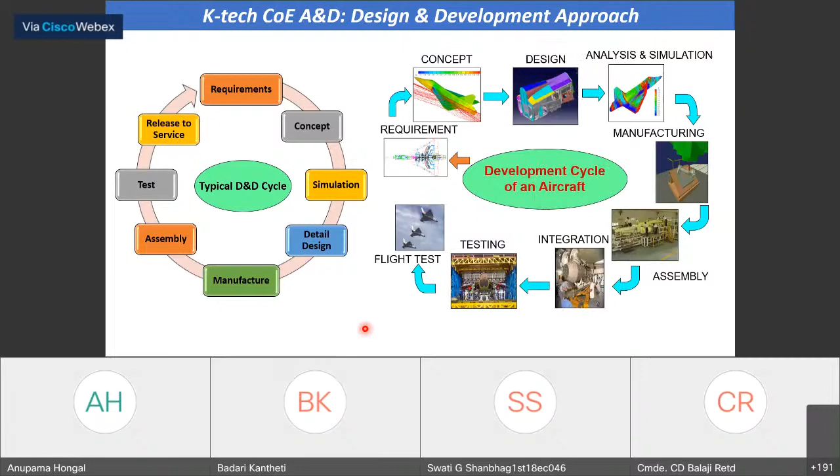So here in this slide, you are going to see the various courses we are covering in the center, apart from the orientation course you are likely to go through the next 3 days. We have a series of certification courses available. What we call the internship program is for the students currently still doing their degree course. And after graduation, if you would like to come to the aerospace fold, that is what we call the foundation course.

In this, you have 160 hours of training, with 30 hours of theory, 100 hours of practice. I'll have a specific slide on that and give you a little more details. And this course, either internship or foundation course, forms the basis for going for the advanced course. In the advanced course, you will be understanding in a deeper sense both the theoretical aspects and how deep you can learn the tools, particularly the CAE and other tools, and apply them to a project.

In this, though it is 4 months, more than 2 months you will be working on a project, so that with the knowledge you have gained and the tools experience, you will perfect yourself before you look for any job or further studies. So that's how the advanced course is going to help you. And students also come and join us in the 8th semester for their project. At the end of the 7th semester, those who have not gone through the internship program will get a complete idea about aerospace.

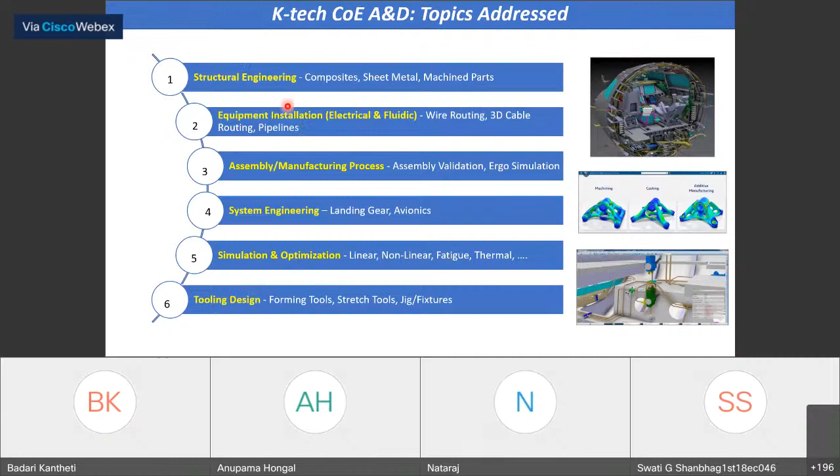In going through all this, your tools are very important: jigs, fixtures, other tools. So you will also be hearing about tool design. Our courses are connecting with all these different topics. Now coming to the internship course or the foundation course: these are the various subjects you are going through in 30 hours.

Along with that, you will also be learning about various CAD tools: CAD, CAM, FEA tools, and also some sheet metal work, piping or tubing, composite design, analysis, and manufacturing. All these tools are available in 3DEXPERIENCE. In the next 3 days you're going to have a demonstration of all the tools and how exactly they can be used.

That lab portion is around 30 hours, and for 30 hours you will be doing a mini project, so that whatever knowledge and tool skills you have gained, you will put into practice, using more than one tool to do this exercise.

And this is about the advanced course. As I said, you have theory and also a digital lab. Apart from that, you also have experts coming from the industry. We'll cover certain areas of theory, but beyond that, what is currently happening in the field, some experts will come and give you.

Other than that, you have a simulator experience. At the same time, you also visit various industries and R&D labs so that you can see how the manufacturing and the design aspects are going on within that industry.

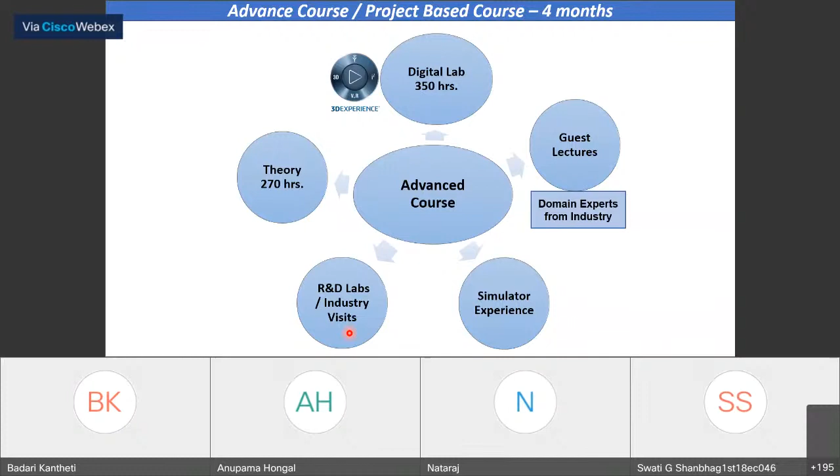So this is the exposure you are going to get through the advanced course. And these are the various tools available on the 3DEXPERIENCE platform connected with design, analysis, modeling, simulation, etc. In this you have CATIA, most of you might have heard about it. Connected with CATIA, an FE package, SIMULIA and Abaqus, is available. You have Dymola, then you have DELMIA.

And also you have one more, as a management tool, to gather all the information and make sure at every stage of the component design progression, are you satisfying all the requirements you have stated? That is the ENOVIA package. Much more is available, but this is what is fundamental, very important for any component design. That is the walkthrough you are going to go through.

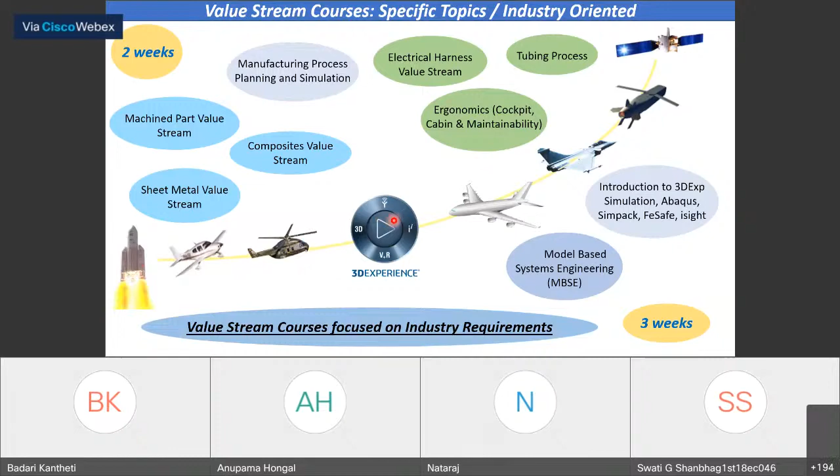Coming to value stream courses, as I said, you have core courses for 2 weeks, and you also have 3-week courses. Any of you interested in any of these courses are welcome to take them and get the certification. In summary, this Center of Excellence in Aerospace and Defense will provide an ecosystem for R&D activity, prototyping, design, analysis, simulation, and manufacturing. All the tools are available. You can get the exposure. These courses are what we have customized at this point, but if the institution comes out with a particular syllabus, we'll definitely try to support you on that also.

Another important thing about the center is that students can exploit the center facilities and the knowledge base at any point of time. You are a part of our center, get one certification, you get the badge. Using the badge, anytime you can contact us, get information, clarify certain things, and if you have an idea and want to check whether it works, you want to use the tool for a few days or hours, you can always come and use it, provided the tools are available at that point of time.

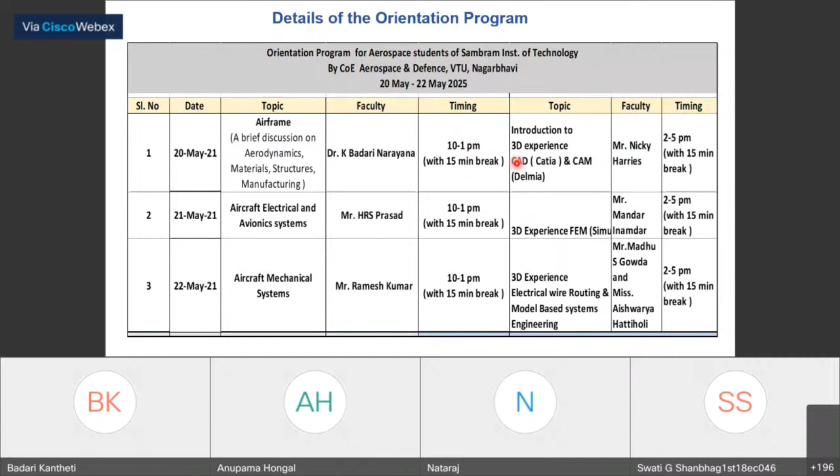So quickly, the program for the next 3 days. After this, I will take you through the airframe. The next 2 days on the theoretical side, two colleagues are going to talk about the electrical avionic systems and the mechanical systems. In the afternoon, we have demonstrations lined up on 3DEXPERIENCE connected with CAD, CAM, FEA, electrical wiring routing, and model-based systems engineering. So you are going to have good exposure, and you can decide which course is interesting to you and which you want to practice.

When we talk about internship and foundation courses, this is what we have at this point, but we have also designed a number of other courses interesting to other students, not necessarily aerospace. As Professor Ravishankar said, this is not meant only for aerospace students. Any student is required in the aerospace domain because it comprises multiple fields, and one student cannot take care of everything. To cater for all that, we have other courses on composites, design to manufacture, and electrical harness, again design to manufacture.

Model-based systems engineering is a widely used tool currently by most academic institutions, so your design process is very clean. You can take simple examples and apply these concepts. And CAD and CAM integration using 3DEXPERIENCE, covering a wide variety of CAM, that is manufacturing, processes. Those interested in production areas, this is going to help you a lot. Of course, you need to understand how to read your drawings, so CAD is very important. From there, how to move into various aspects of CAM, that is what we lined up.

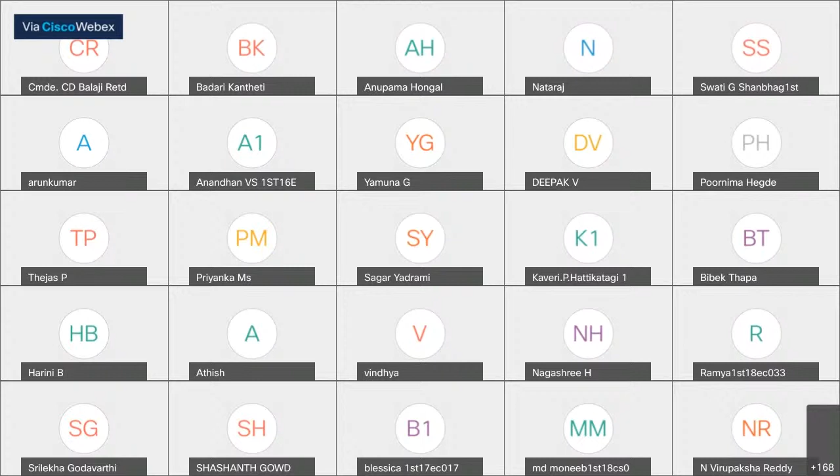Like Professor Ravi Shankar brought out, aerospace is a domain which encompasses all fields of engineering. And there are multiple computers. For example, in Tejas, which I was part of, there are at least about 30 to 35 computers of different types. The hardware design is done by the electronics people. And each of these requires an extensive amount of software. So software development, both algorithm level, the actual coding, as well as software quality testing, is done within the aerospace community by computer science or information science people.

So there is a significant amount of exposure and utilization that computer science people have within the aerospace domain. Like I said, every branch of engineering comes together. In fact, for structures, civil engineers actually do the structural design and so on. So there is scope, and part of it will probably be answered by Mr. Prasad in tomorrow morning's session. I hope I have answered that question from one of the students. Thank you.

So this presentation is visible to everybody, I suppose. Dr. Badari. Yeah. Am I audible? Yes, sir. Okay, how about this presentation? Visible? Yeah, visible, sir. Okay, right.

Thank you. Okay, so quickly, over the next 2 hours, I will take you through the airframe systems. It is one of the important systems in the entire aerospace vehicle design. In the airframe, when you are talking about the frame, you are talking about a structure. That means some shape. The shape is given through certain materials and a certain manufacturing process you assemble together. That's the skeleton or structure you are going to get, and that is the flying machine. And we are talking about aircraft, so naturally it flies in the air.

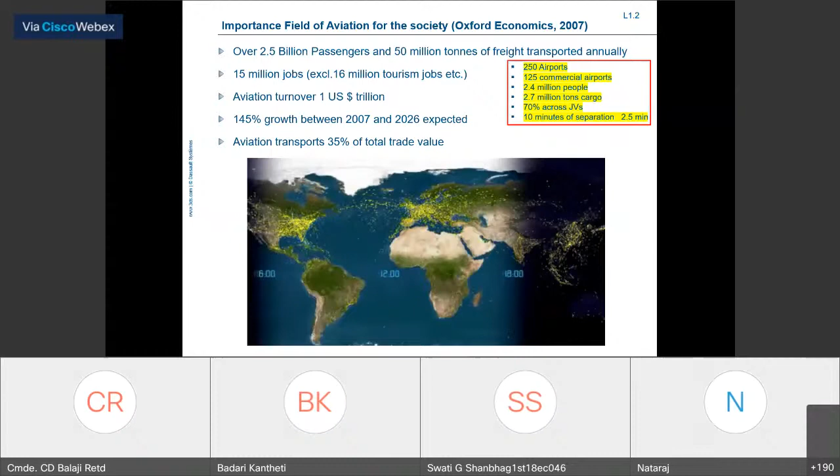Okay, when you're talking about aerospace, we are talking about two things. One is aeronautics, the other one is astronautics; put together, aerospace, which is a very, very fascinating subject. We'll try to take you on the journey of the entire aerospace vehicle. But once you are in space, the space environment also you have to take into account while you do certain designs. Otherwise, in this case, the vehicles are within the Earth's atmosphere, like aircraft or helicopter, etc. Whereas when you're talking about astronautics, we are talking about the vehicle going beyond Earth's atmosphere. That's where you have launch vehicles, satellites, missiles, etc.

So all these vehicles work on three principles. We know very well the balloon or airship, which we have been using for centuries. They work on buoyancy. We started with hot air, then hydrogen, and currently we are using an inert gas, helium. Then another one is using Newton's principle, second and third law. That's where your rotating blades, helicopter, or a fixed wing come in.

The cross section of a wing is what we call an aerofoil. As the aircraft is moving, the air moves over the top and the bottom of the aerofoil or the wing. So a lot of changes happen. The velocity keeps accelerating on the top and is more or less fairly constant at the bottom. This makes a big difference in the pressure differential. At the same time, the volume of air moving and the momentum of the air coming out causes the force generated.

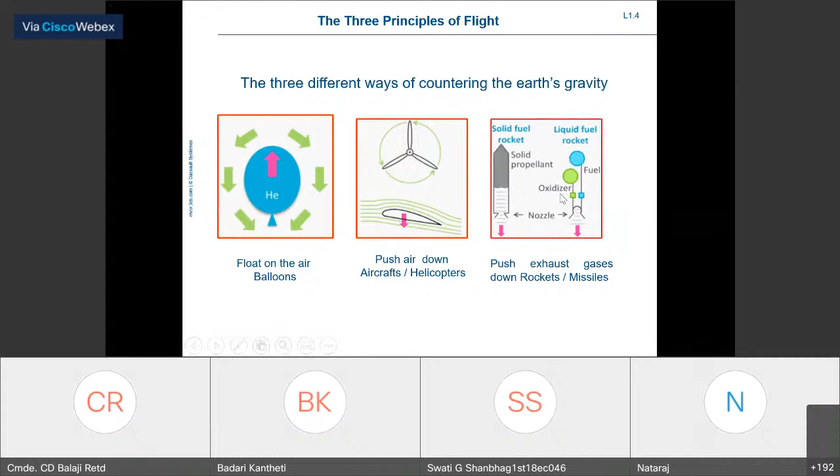So that means force is generated. Because it is not held, naturally the reaction force is in the other direction, so it starts moving. That is what is actually happening. So we are trying to use one of these principles in order to overcome gravity.

Coming to the aircraft, you have lighter than air and heavier than air. This is where the balloons or the airships come in. And you have rotary wing, helicopters, or fixed wing. So now you have the aircraft.

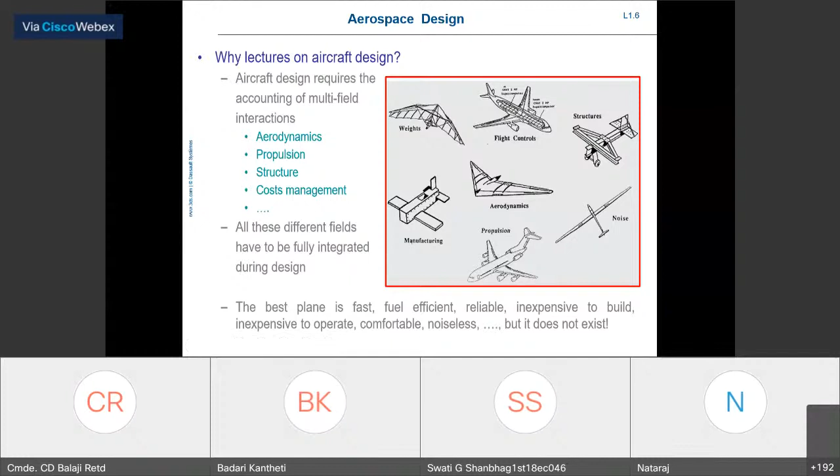As we are discussing aerospace design, aerospace design looks for multiple field interaction. This could be aerodynamics, structures, propulsion, controls, various systems and all those things. That is why all the different fields have been integrated during the design stage itself. That is very important in order to get a plane which is faster, fuel efficient, reliable, inexpensive to build and operate. All these characteristics we would like to get through our design.

At this stage, for the benefit of all the students, some of you might have seen this clipping through various media, I'm not very sure. This is a jumbo 747. In a quick sense, he will try to explain to you how this big tonnage is lifted into the air, how the aerodynamics works and what supports that, and also, if you want to control it, how you control it. Of course, he is not going to go very deep, but it will definitely tell you how the aeroplane actually flies.

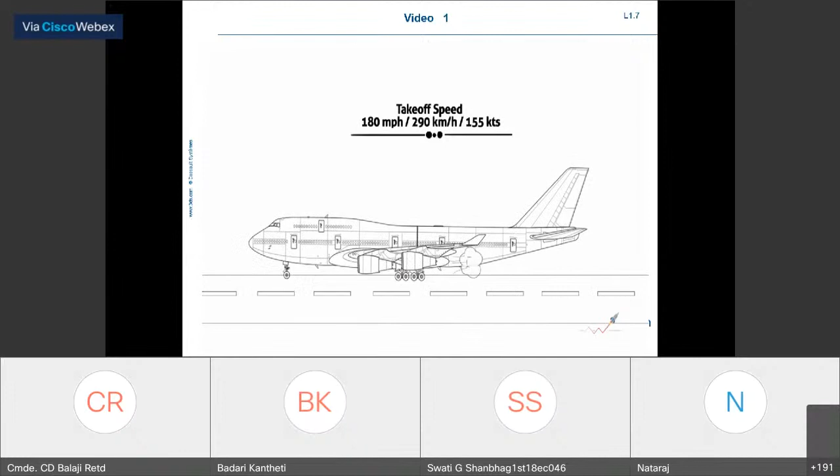Those who have ever flown on an airplane know that it's an enormous, amazing machine. A typical 747 can carry more than 500 passengers and weighs around 800,000 pounds when taking off. Yet it rolls down the runway at a speed of 290 kilometers per hour and, as though by magic, lifts itself into the air and can travel up to 13,000 kilometers without stopping. Incredible, isn't it? Today, we are going to learn how an airplane flies in a very simple way by going through the aerodynamics of an airplane, the main parts of an airplane, and controlling the airplane.

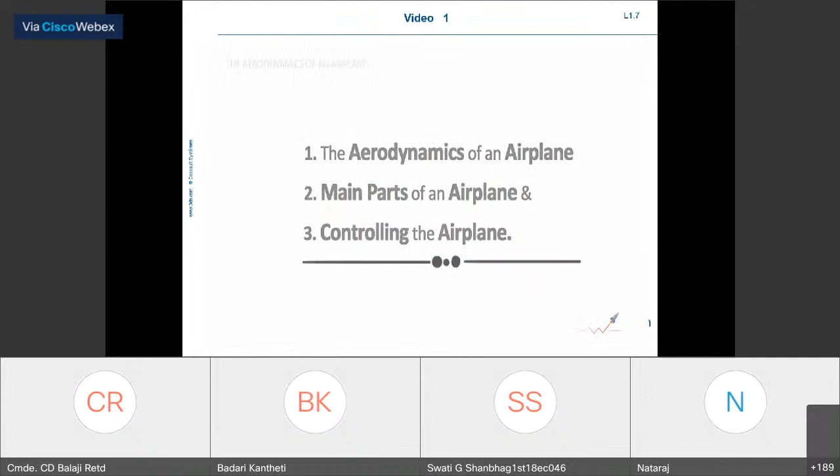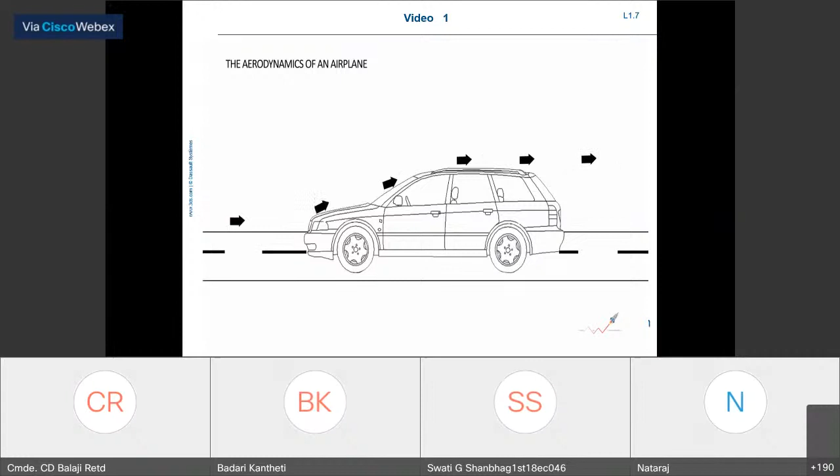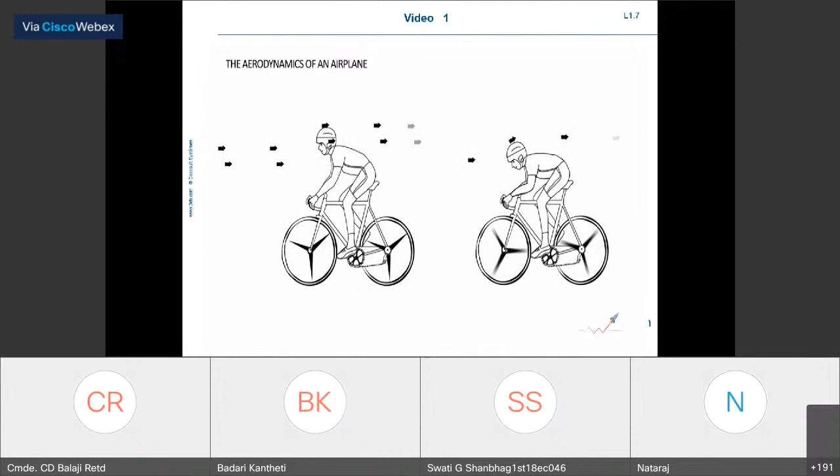The aerodynamics of an airplane. The 4 aerodynamic forces of an airplane are drag, thrust, weight, and lift. Drag, also called air resistance, refers to the forces acting opposite to the relative motion of any object moving with respect to a surrounding fluid. The energy it takes to push through the surrounding fluid creates drag. You may have noticed an excellent example of drag reduction in track cycling. The cyclist must push through the mass of air in front, but a streamlined sitting posture that cuts through the air more smoothly enables a cyclist to travel much faster with less effort. The airplane always retracts its landing gear and nose gear into the body of the plane after takeoff to reduce drag.

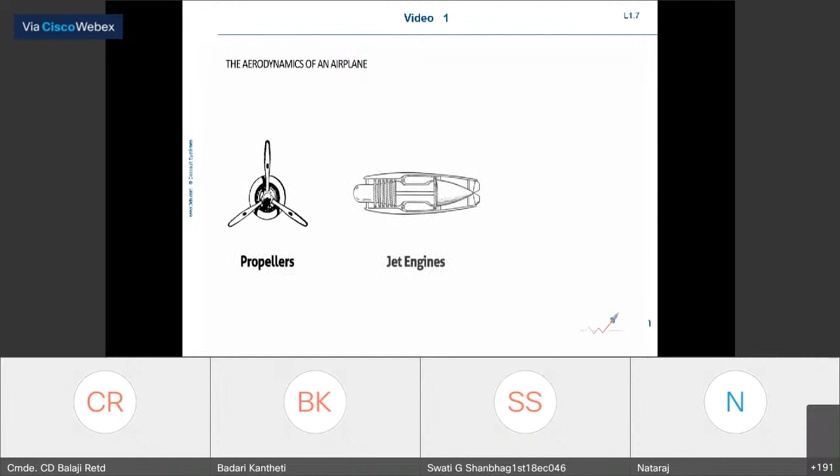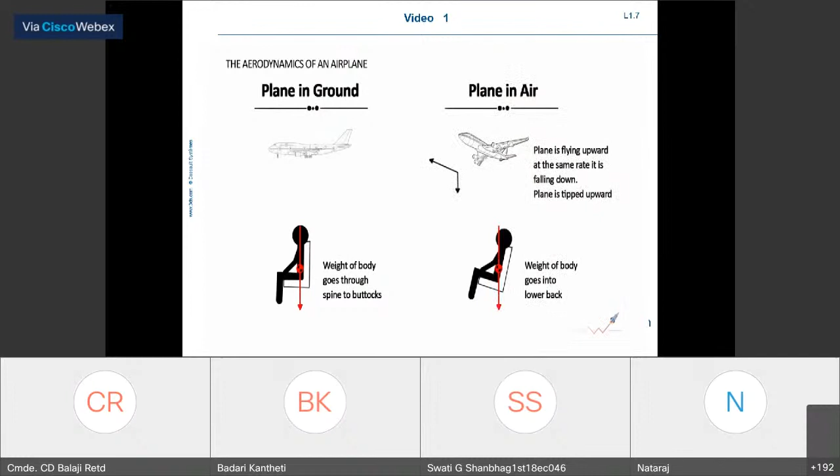Thrust counters drag. It is a mechanical force that keeps the airplane moving in the air. Thrust is generated by propellers, jet engines, or rockets. The compressor inside the jet engine takes the air and compresses it, and after processing through the combustion chamber and turbine, the gas is blown out through the exhaust nozzle. Here, Newton's third law of motion is applied, where the gas is pushed backward and the engine is pushed forward. Weight is the airplane body, passenger, and luggage weight in total. Lift overcomes the weight and holds the airplane in the air. Lift is created mostly by wings to keep the plane aloft.

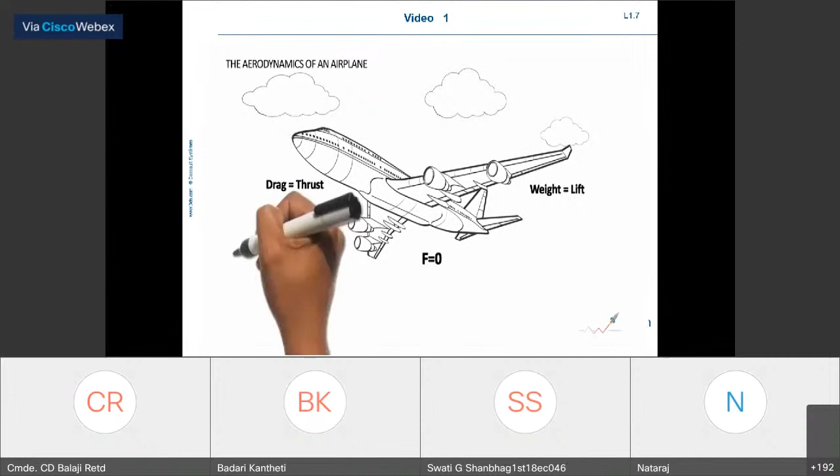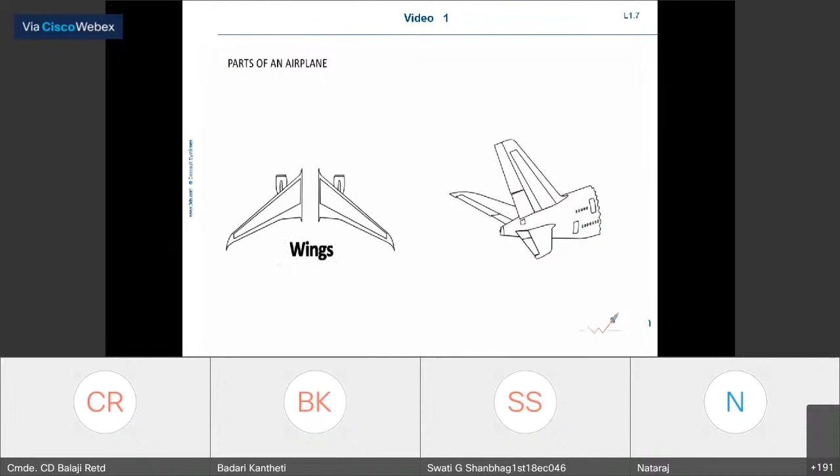So, to keep the airplane flying straight and level, this must be true, which means no net force acting upon an airplane. If drag is greater than thrust, the plane slows down. If thrust is greater than drag, the plane moves faster. If weight is greater than lift, the plane descends. If lift is greater than weight, the plane climbs. Parts of an airplane. The basic parts of an airplane are 1. wings, 2. horizontal stabilizer, and 3. vertical stabilizer.

So here he is not talking about the major parts, he is talking about the parts that are important for controlling the vehicle. We'll try to see that in a next slide.

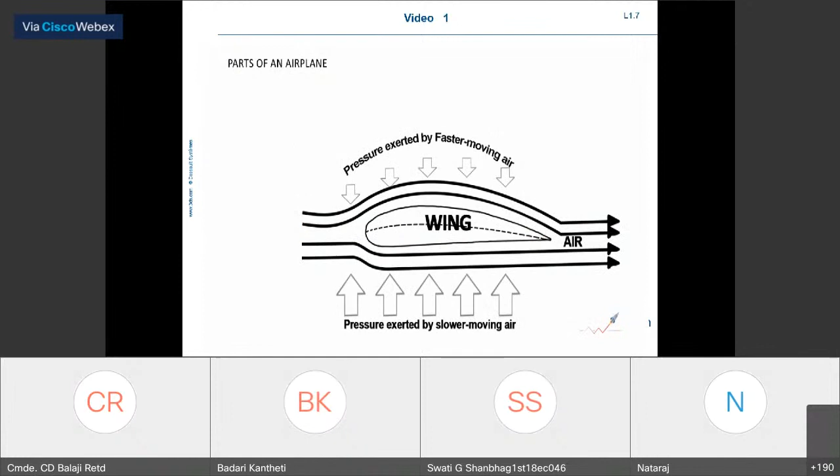The wings. This special shape is designed to deflect the air at the bottom of the wing, so more air strikes the bottom and less air the top of the wing. As the airplane rolls down the runway, higher pressure and more upward force are produced below the wing and lower pressure and lesser downward force above the wing. The net result is the lifting of an airplane.

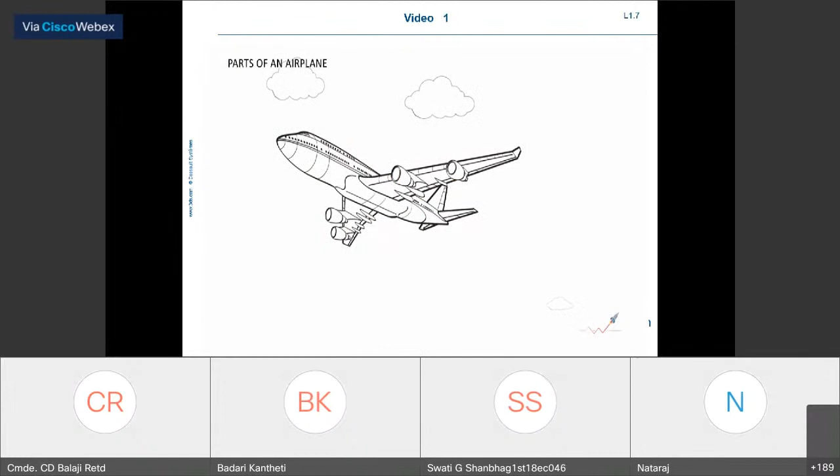Stabilizer. Stability in an airplane is a tendency to return to its initial state after a disturbance from that state. Horizontal stabilizer performs this function when the disturbance force causes the nose of an airplane to move up or down. Such movement is called pitch. Vertical stabilizer provides stability for a disturbance in yaw. Yaw is side-to-side motion of the nose.

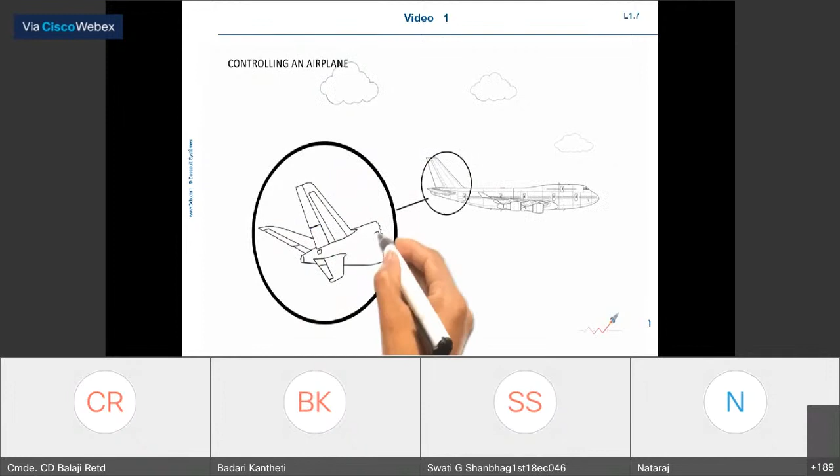Controlling the airplane. So what are the components in an airplane which control the flight, direction, and height, and maintain the equilibrium? It's elevator, rudder, and aileron. The elevator can be deflected up or down to produce a change in the downforce produced by the horizontal tail. If the elevator is deflected upward, it increases the downforce produced by the horizontal tail, causing the nose to pitch upward. If the elevator is deflected downward, then the counteracting force causes the nose to pitch down.

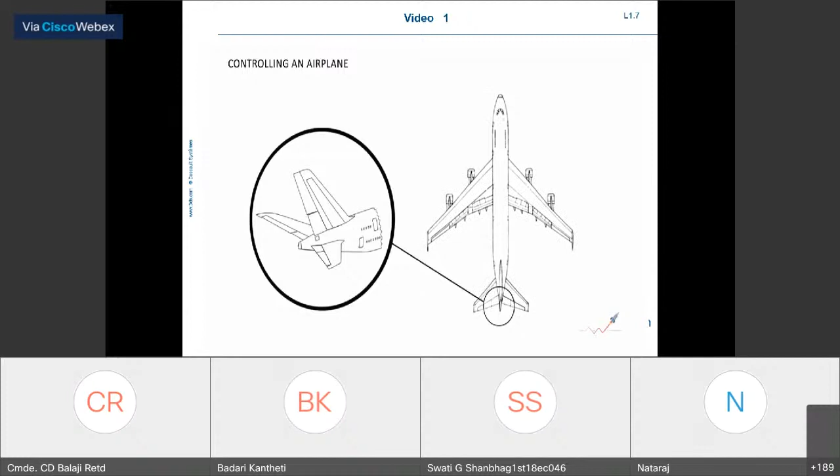The rudder can be deflected to either side to produce a change in the side force produced by the vertical tail. If the rudder is deflected towards the right, it creates a side force to the left, which causes the nose to yaw to the right. If the rudder is deflected towards the left, it creates a side force to the right, which causes the nose to yaw to the left.

Ailerons are located on the tips of each wing. Ailerons can be used to generate a rolling motion for an aircraft. Ailerons usually work in opposition. If the right aileron is deflected upward, then left is deflected downward, and vice versa. Let's see this. To curve the flight path, the pilot deflects one wing to move up and the other wing to move down by controlling the aileron.

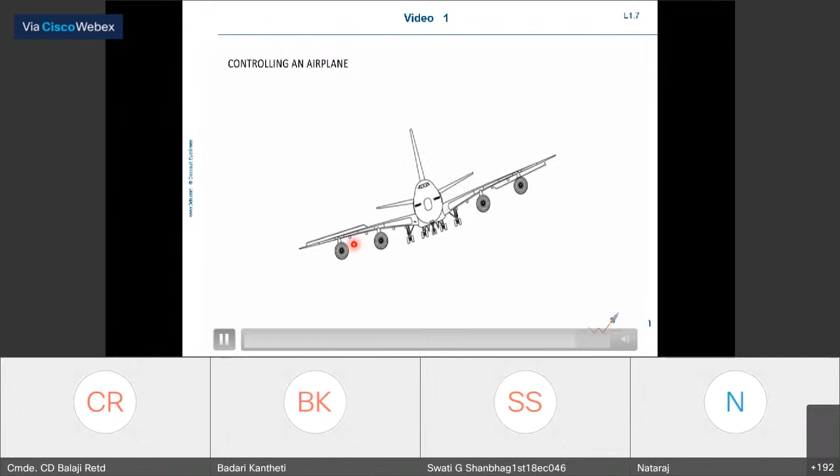With the left aileron in downwards direction, the lift will increase, whereas at the same time, the aileron of the right wing is in the upward position. Therefore, lift on the right wing is decreased. The result will roll the aircraft to the right. If the pilot reverses the aileron deflection, right aileron down, left up, the right wing will lift up and the airplane will roll to the left. The next time you travel in an airplane, you'll know how it works.

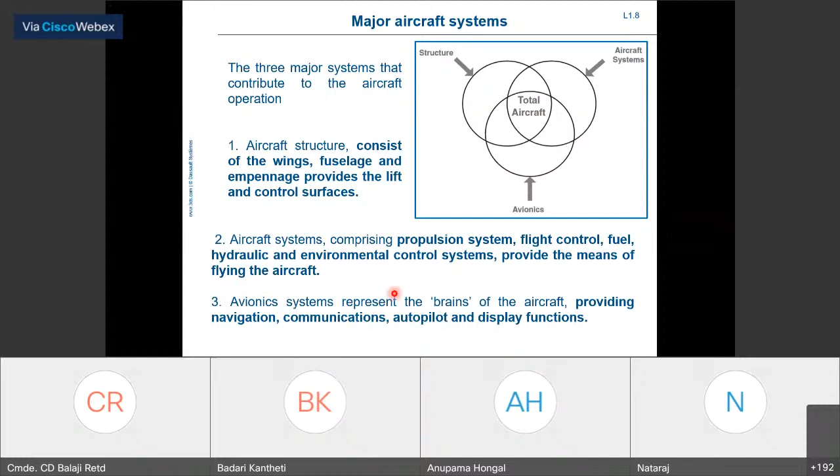Then within the body, you have the various systems, which will provide a means of flying the aircraft. I think tomorrow you are going to hear more on this. The systems like propulsion control system, fuel system, environmental control, all those systems are used. But at the same time, you have to always navigate during the flight and communicate within and outside also. At the same time, what are the parameters with which the flight is taking place? You have to display all those things. Avionics and the electrical system play a very, very key role. So that is another system. So now you have airframe, then systems and avionics.

So as you understand rightly, airframe is all hardware based. So that means a strongly physical integration of the airframe along with the systems. All these systems are connected at various locations of the structure. So that's why there is a physical integration of these two systems. But these systems will try to generate energy and transfer energy from one place to another. So the systems along with avionic systems will try to communicate appropriately. So that is why there is an information based connectivity between these two.

At the same time, the avionics systems are responsible to look into the mission completion aspects. That way, whatever the mission may be, information based integration is achieved between these two systems. So in any product development, you might have understood all these steps are involved, critical steps, concept to freeze the concept and try to identify which concept is evolved to take it to the final product.

That's your definition stage. Then you go through the design at various stages, and then verify your designs. Then try to build one or two components and test them, and make sure everything is working as per the requirements. Then you try to release for operation.

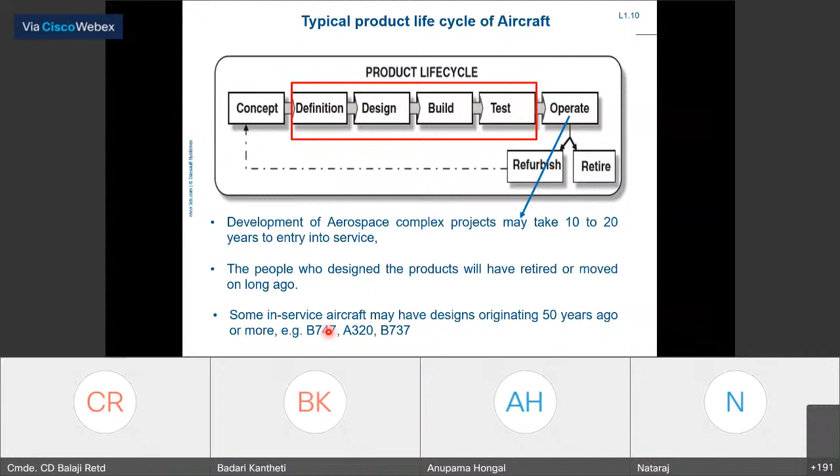Particularly, aircraft that have been developed over 50 years ago are still working. These were available around the 50s, 60s, 80s, but still various variants of the same thing are working, with improved materials, improved interiors, improved capability of the engines, etc. Thereby efficiency is increased and fuel consumption and emissions are reduced.

So in the overall design, we have to look into every aspect of that. When we talk about aerospace or aircraft design, we are talking about four branches connected with the airframe, mechanical systems and avionics. This is what I'm going to take you through in the next few slides.

Structures, materials and fabrication give you the physical system that you see. Aerodynamics helps the physical vehicle to fly, and the control system will navigate and support the movement of the vehicle from one place to another. This is some of what we are going to see.

To start with, I will take you to the structures, so you can see the physical vehicle. Then later I will go through aerodynamics and control. Then in the last stage, I will take you through materials and fabrication.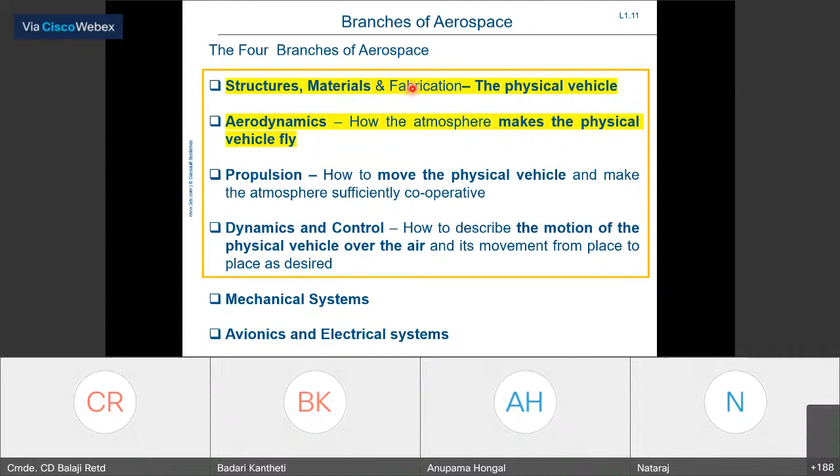In the air, you have aerodynamic loads, which could be smooth air pressure or gusts of air as you fly from one place to another. Thrust loads are going to be there. Overall weight is going to be there, and because it's all dynamic, inertial loads are going to be there.

As you go up into the atmosphere, internally you have to maintain a certain atmosphere, so pressurization cycles will be there. While taking off or landing, particularly, you have shock loads. These are the minimum design loads that are going to come.

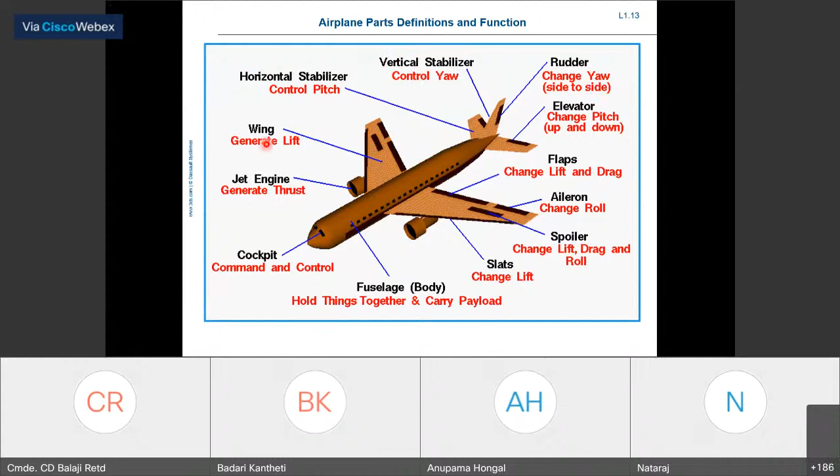So what you see in this picture is not only the parts; their functions, what they try to do, are given in the red color. Okay, we'll try to understand more on that. So as you understand the skeleton, the major components are nothing but the skin for the fuselage. Interior, you have a number of frames. And all these frames are interconnected by long members, one-dimensional members. So you can call them stiffeners, stringers, etc.

A similar construction is also there on the wings or empennage. But here the skin, and at the same time a number of ribs are going to be there, shorter ones and longer ones. And you have a number of control surfaces at the rear side and the front and also in the middle. And this will also house engines, or various tankages to carry the fuel, and it will also support the main landing gear, or the nose landing gear. So this similar construction is also available here. So that is what actually happens in the wing and empennage.

And the engine, for example, in all these cases also, because various systems are there, you have a number of fittings and brackets coming at various locations. These brackets are also required because tons of wire are going across the aircraft, pipelines and tubings are going, to hold them properly. So all those things are required.

So similarly, in the case of the engine, the pylon is nothing but how the engine body is connected to the fuselage. That particular portion is called the pylon, with a number of brackets. Nacelle is nothing but the podding or the outer covers. So a number of parts are connected with that, and also the tail cone where the exhaust is streamlined to go out, and the heat shield covering the exhaust so it does not come onto the wing or the fuselage. That depends on where the engine is connected.

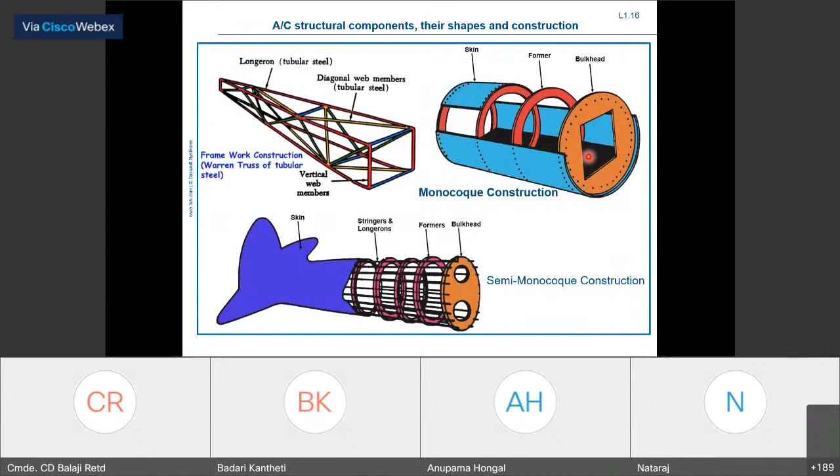Apart from that, for certain components, though I have not shown any picture here, we also use what we call sandwich construction, which is a much, much lighter construction. All the control surfaces of the aircraft are made of sandwich construction most of the time. Maybe they're also stiffened, but because weight is important, wherever you can cut down, you cut down.

As a designer, as a structural analysis person or a structures person, you need to understand what load is generated, where it is generated, and what path it is transmitted through. When it is moving through the basic elements of the structure, whether the member can carry the load, in what form it is going to carry the load, or whether these members are efficiently placed to take care of this load distribution. And you have to consider when these members are going to fail, and what the maximum load carrying capacity is. These are some of the things we'll always be thinking about as a structural engineer or design engineer, so you can address all the failure modes of your component or construction.

So this is what people are going to learn through structures, any structures, not necessarily aerostructures. But aerostructures are much more stringent from the quality point of view and the regulation point of view, so we'll try to implement that rigorously.

So at this point, I'll try to show you one more clipping, another 2 or 3 minutes. This is a student project where you are going to see the skeleton of a business jet developed by MSc students, where you can see structural elements of every major component, fuselage to wings to empennage to landing gear, and also a few of the various mechanical systems, and some avionic systems.

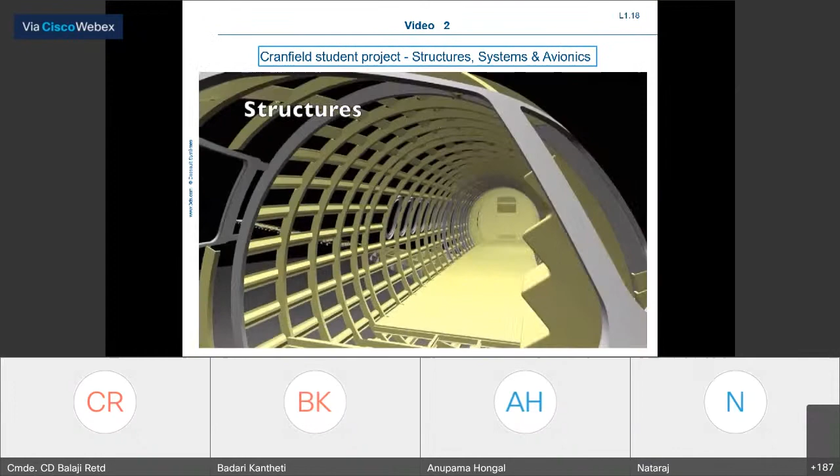You can see the structure. You can understand the fuselage, how the construction is. This will change from vehicle to vehicle. There is no uniqueness; the novelty is your innovation. How do you conceive the loads coming? How exactly do you want to place your material? In what form do you want to place the material?

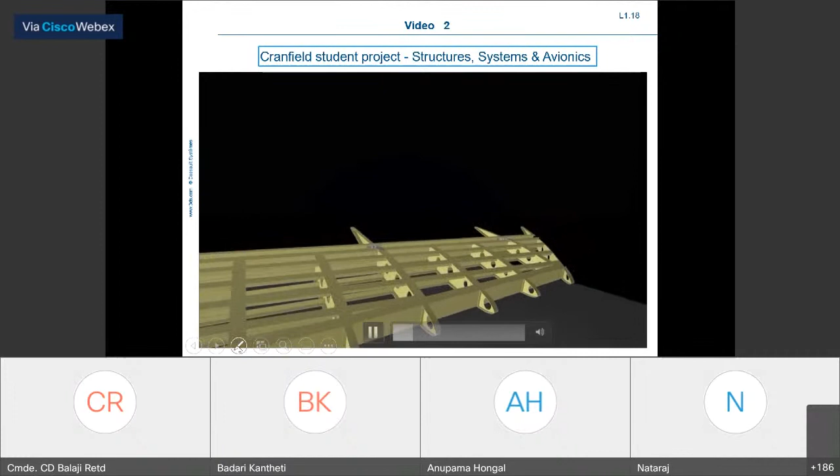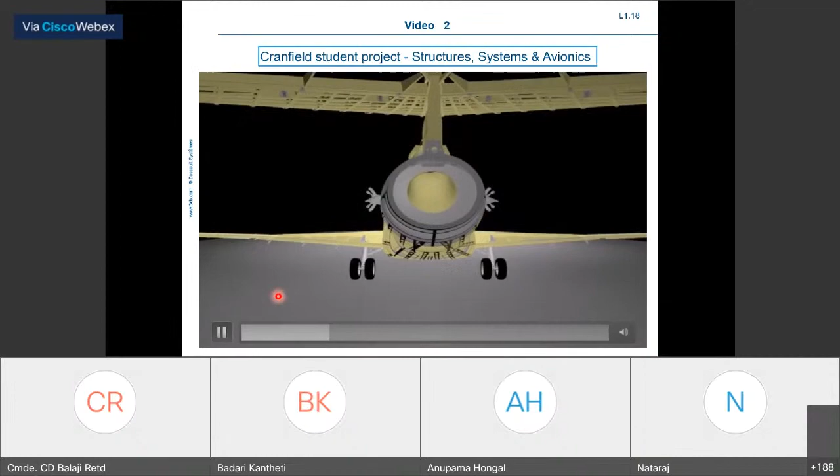You can see a series of ribs here. The horizontal and the vertical stabilizer with a number of ribs. Based on the aircraft, you can think of different constructions. You can see the landing gear, the entire wing.

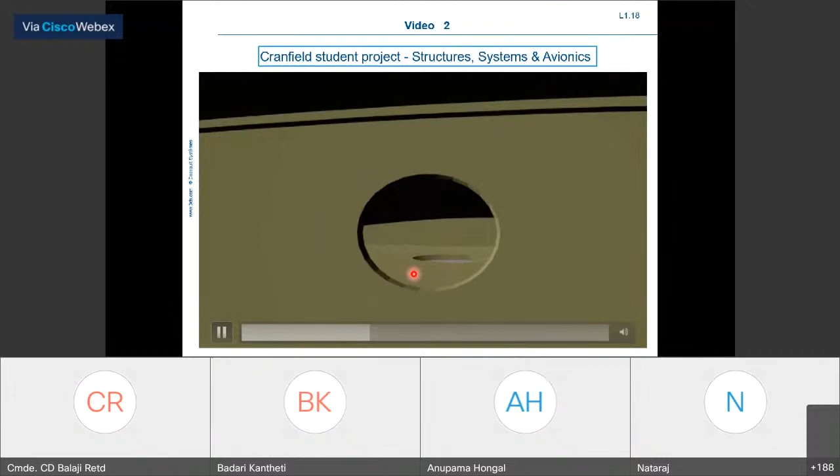As you walk through the wing, how is the construction? In order to reduce the weight, or to allow certain tubing and piping or maybe electrical wires, you may require certain cutouts. Then how do you attach the landing gear, the main landing gear?

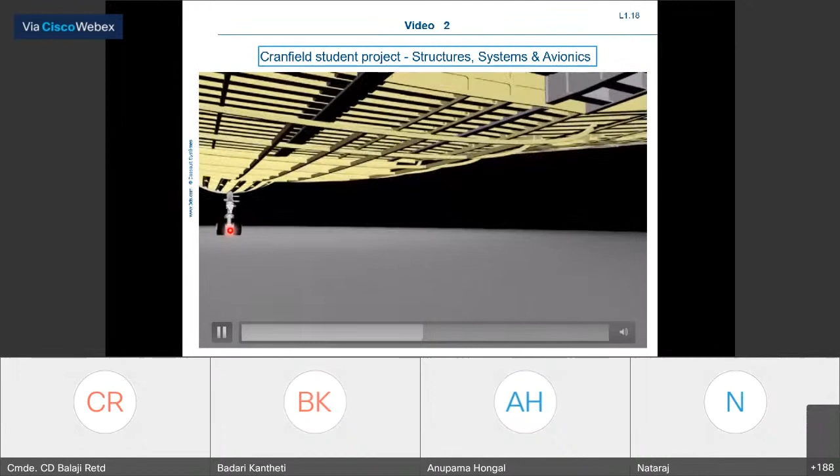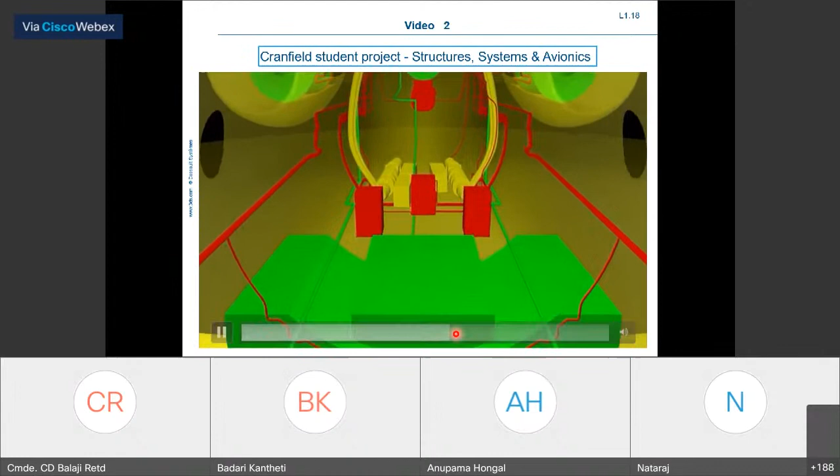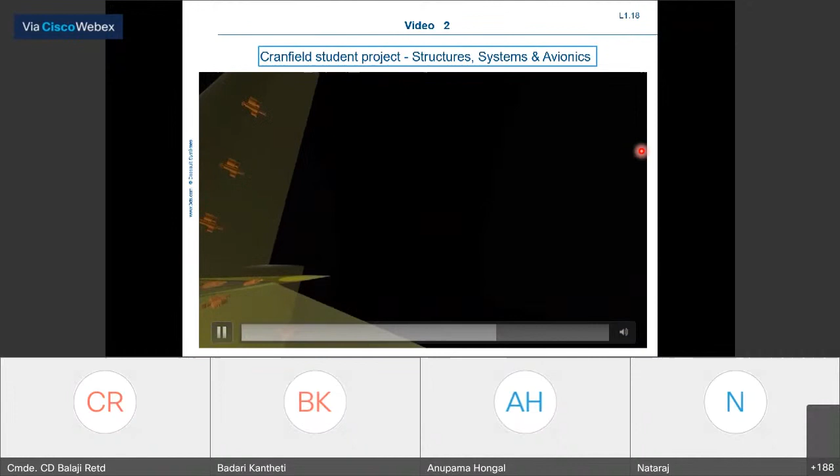Now you can see different systems. Prominently, they are going to show you the fuel system, propulsion system, and also electrical system, and the tubings. And also they show you the fuel tanks, where they are located. A few avionic systems, radars, etc.

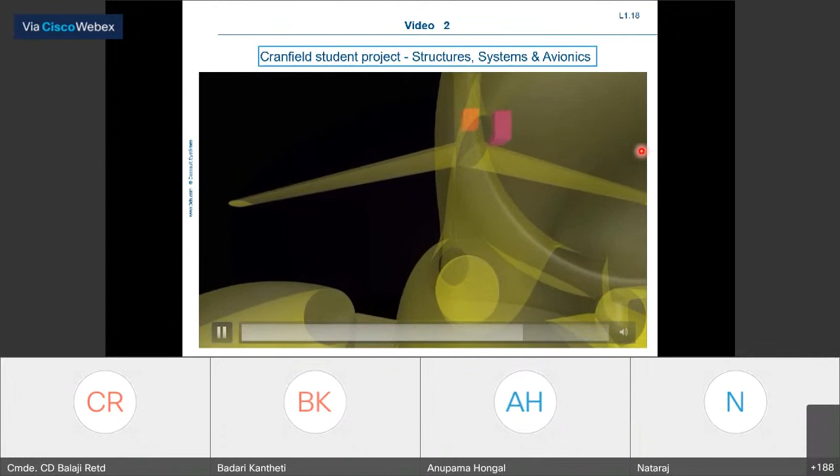So now I'll take you through another system, that is aerodynamics and controls together.

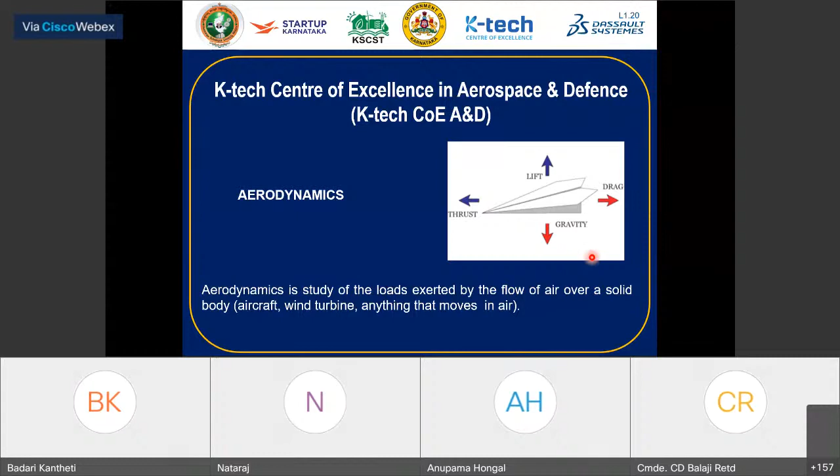So how does it work? It has to generate the pressure differential based on the configuration, and it follows the fundamentals of aerodynamic laws, that is, conservation of mass, momentum and energy. You might have heard about Bernoulli's principle, particularly those from the mechanical side or those who have taken fluid mechanics. That is your momentum equation, which can be simplified to Euler's equation, giving a relation between the pressure variation and velocity.

Now to that, you add one more term, the potential energy of the fluid particle with respect to ground. That is your Bernoulli's principle. In this case, we assume the aircraft is moving parallel to the ground, so that term goes. That's how we use Bernoulli's principle to understand the pressure variation, using the contour of the moving body, particularly the wing or a cross section of the wing, the aerofoil, contoured in such a way that you get the best benefit out of this.

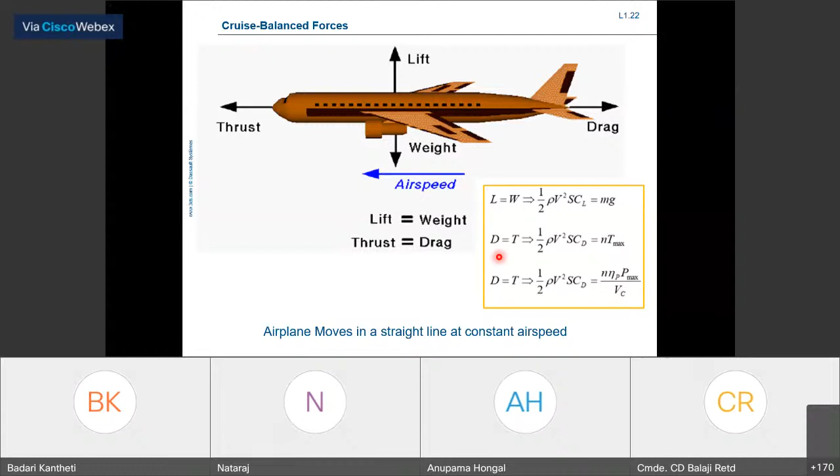So that can be generated by jet engines or by propellers. So that's why you have two equations: jet engine and its efficiency, propeller and its efficiency, and also what is the maximum critical speed it can move at. So these equations are useful in the early design of your components in order to find out how much is the wing area and what the aircraft engine requirements are. So these are simple things.

A component of the force is nothing but you integrate normal to the aerofoil, or normal to all the aerofoils along the wing. So that is the resulting lift that we are going to see. So in this process, how the aerofoil is tilted with respect to the airflow, what is the contour of the aerofoil, how much is the surface area of the aerofoil, what speed the vehicle is moving. So these are a number of critical parameters.

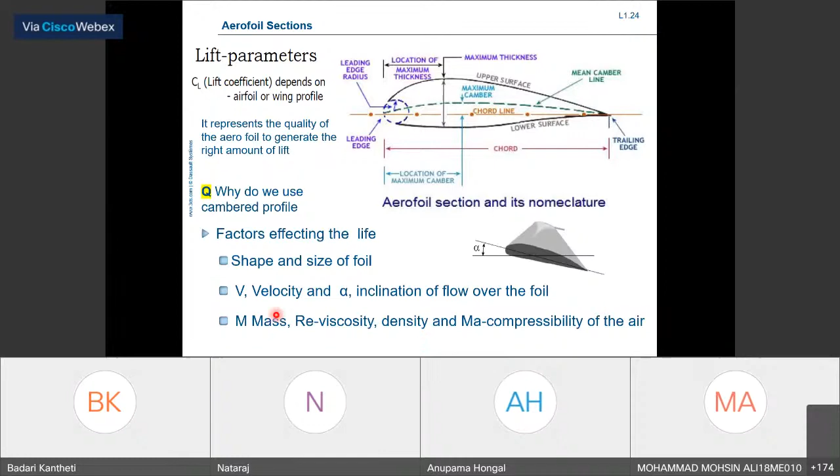So another important thing is, based on the nose up or down. That is required in order to control. At the same time, during any disturbance, you try to change it. So now a smooth flow is going to take place. Now this leading edge and trailing edge, whatever joins them, that is the chord. With respect to airflow, you try to lift the nose up, so the angle of tilt of the chord is increased.

So now airflow is going in that direction. This is a higher velocity, that means a low pressure, and this flow tends to move inside. So that is where you have a lot of turbulence. Any turbulence is nothing but a drag. That means this is going to cause the lift to come down. That's why the important parameter the designer looks at is angle of attack: how this angle is changing with respect to airflow and how the lift is being generated.

The lift keeps on increasing. At one point, it starts coming down. So beyond that, we should not operate the vehicle, particularly in the initial stage where the velocity component is very small, on the ground about to lift. So you have to appropriately take care of it by the area. But in a fixed wing, the area is fixed. The area is already there.

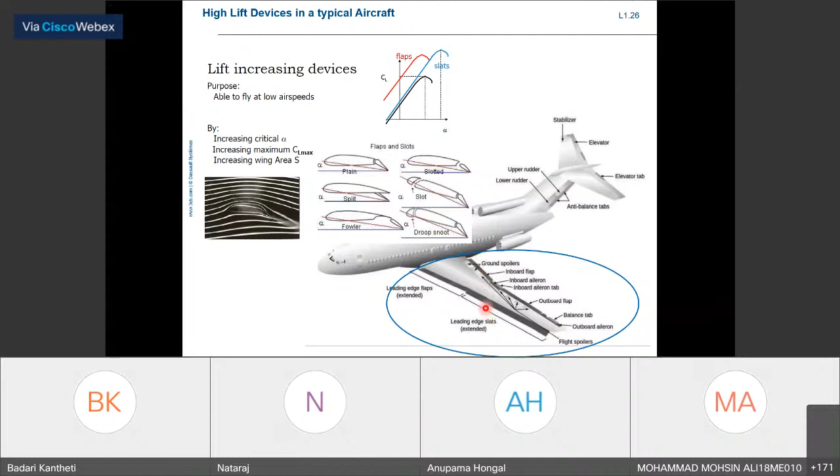Now you see, without all these additional surfaces, your lift is somewhere here. By having the slats on the leading edge, your lift is increased for any angle of attack. By having these flaps, you are further increasing it. So effectively you use these two surfaces when there is a requirement for higher lift.

Okay, so now coming to another aerodynamic parameter, a very, very important parameter, which is involved in the sizing of the engine: the drag. The drag is wasteful work. We have to cut it down as much as possible, but you don't have complete control. What you have control over is how to reduce the drag by various means of streamlining and perfectly maintaining the surfaces, and also the interference between one body and another where they are connected. So there are various types of drag. If you are able to control all these components of drag, overall you try to reduce it.

So to give you a flavor, probably in fluid mechanics, mechanical people or other streams of engineering, if you have gone through it: you have a plate. The stream goes equally over both sides. The pressure differential is nothing but zero there. Or if you put an aerofoil like this, there is some pressure differential. When you put a ball in the flow, there's a huge amount of turbulence. That means the pressure variations are very, very drastic. Compared to friction, the pressure distribution is causing that.

Or the same plate you put at 90 degrees. So virtually you have the form drag. The nature of the construction, the form, is such that you are going to get 100% drag there. So these are the things which are visible to us. Based on that, you try to streamline. That is the message here. At the same time, with the angle of attack, we have also seen how the lift is increasing and how the drag is also increasing.

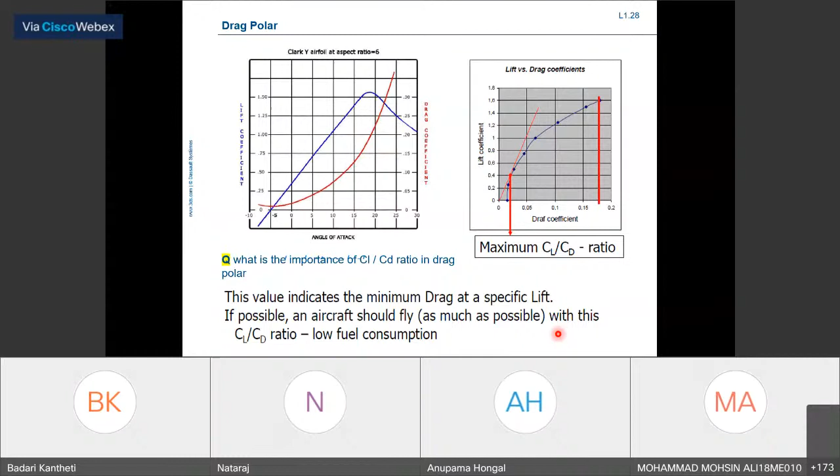Another important thing in aerodynamics is what we call computational fluid dynamics. So two things: you can make a model and do tests. That is actual testing. And for every component you have to do prototype-level tests, a small one, a bigger one, like that. You have to put all the information together, and finally you can come to a conclusion on how much lift, how much drag, what the capacity is and all.

Now with the advent of software and highly powerful computing systems, it is possible to reduce or minimize the testing as much as possible, understand the variations of all the configurations, and get the best configuration for the aircraft under design. These things are possible with computational fluid dynamics.

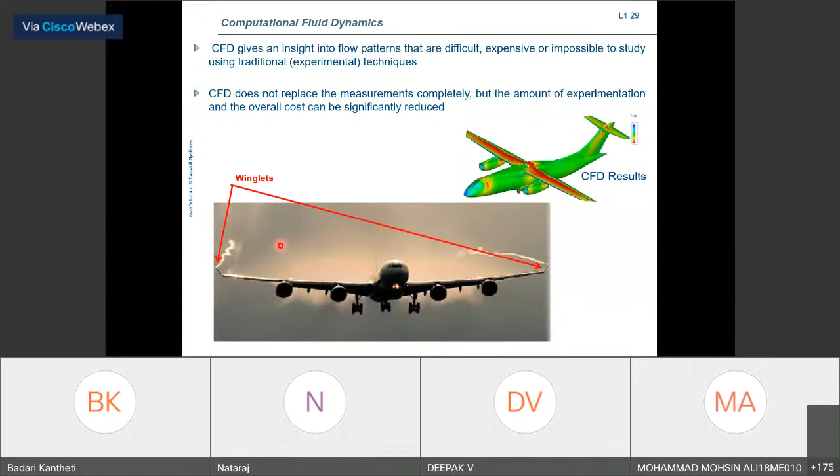The reduction is possible with what are known as winglets. That's what you see: a small projection at the end of the wing. Whatever is happening in this area, you are making it happen much farther away with a small construction, so you reduce the drag as much as possible on the main wing. This is another technology developed by NASA way back in the 70s that is also extensively used.

When we are trying to talk about various flight conditions, the atmosphere is not the same. Point to point, it is going to vary the density and the pressure and temperature there. So now the lift parameters are going to change, whereas the drag is also changing. So thereby the aircraft actually deflects. This may be a static deflection or it can be a dynamic deflection.

If it is going to be dynamic, you have to set back to the normal position. So that is where your stability and control actually comes into picture. That's what we also call flight mechanics. So why are you trying to do it? You have the mechanics and dynamics in order to make sure the aircraft does the right work, whatever

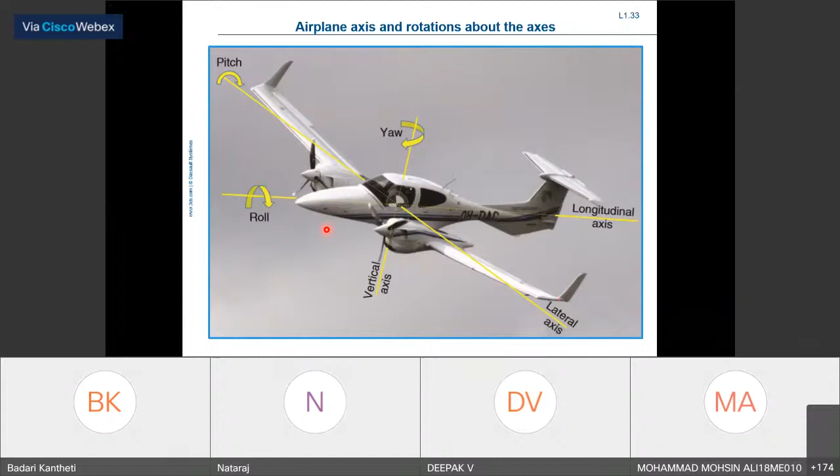So this is what is important: which are the controls that move or rotate the vehicle in these three axes. Those are the primary control surfaces. One set of surfaces, ailerons, is located on the wings far away from the midsection of the wing or the fuselage, and another two control surfaces are in the empennage.

while you are differentially operating these ailerons, is possible when the aileron is deflected in such a way that you generate more area in a favorable configuration. On that side, you generate more force compared to the other side. If the aileron is lifted up, you are disturbing the airflow there, so the pressure is disturbed and the force comes down on that side. So one side force is more, the other side force is less.

So this will try to lift. At the same time, the vehicle is moving forward, so there is a tendency for it to rotate in that direction. This is how you use the control surfaces. Similarly, the horizontal surface or the vertical surface move down or up, or right or left with the rudder. When it is moving right or left, the aircraft will try to move right or left.

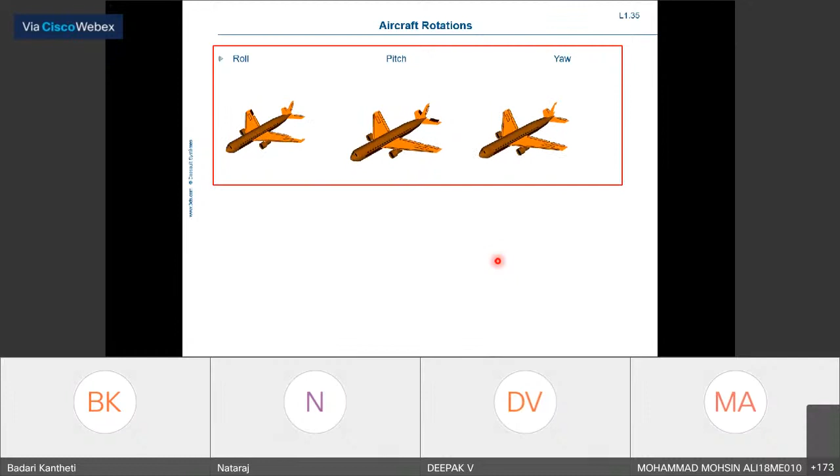So what you can observe, I request you try to see one at a time, so that you can feel exactly what is happening to the aircraft by changing the control surfaces and their motion, how it is actually rotating. So you can see the roll rotation, a pitch rotation, or yaw rotation. Okay, so that's how the control surfaces work.

And here, as we see, we have primary controls. You have the ailerons here. Then you have the horizontal stabilizer, vertical stabilizer. You have the elevator and rudder. And you have a series of flaps on the trailing and the leading edge of the aircraft, what we call the slats or slots. And also on the top surface here and here, you are going to have the spoilers. So these surfaces, what we call the secondary surfaces, are high lift devices.

Particularly, they are going to be used during landing and also takeoff, because during takeoff you are trying to fly at lower velocity and gaining velocity as you go. So naturally, you require more lift. How do you generate it? By changing the contour of the wing, the contour of the aerofoil. At the same time, you are trying to increase the surface curvature. In turn, you are trying to get that.

While you are about to touch down or land, you want to cut down the speed. So air brakes can be applied, or you deploy your flaps in such a way that they resist the airflow and give you the speed at which you want to bring it down. So this is what you have: primary control surfaces and secondary control surfaces.

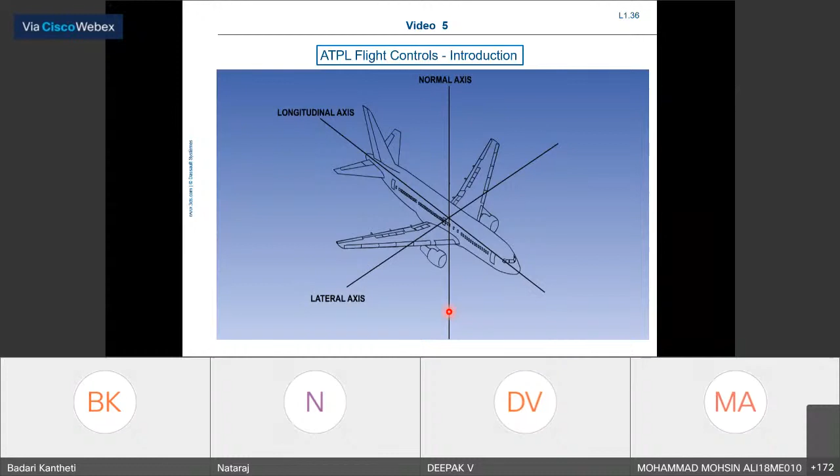The movement around an axis is produced by changing the aerodynamic force on the appropriate airfoil. Now try to see here, this is the camber or the curvature you are trying to change, and at the same time you are going to get more area. Changing the angle of attack or incidence of the aerofoil, or decreasing the aerodynamic force by spoiling the airflow. These are all the spoilers.

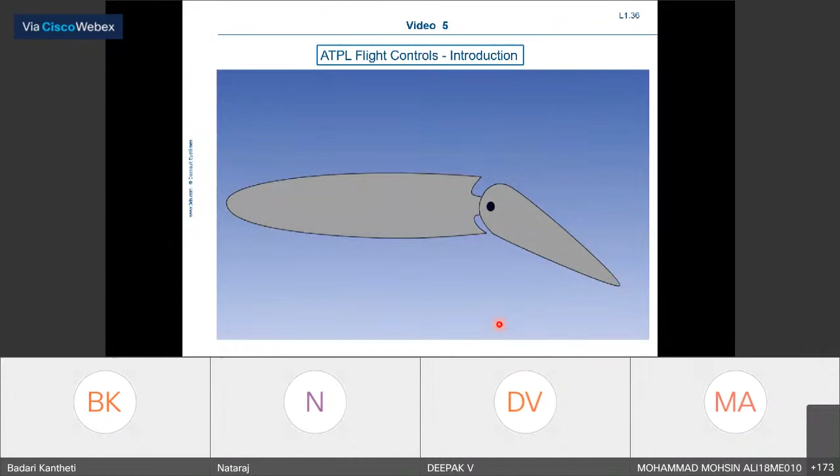The most common method used is to change the camber of the aerofoil. This is done by deflecting a control surface on the trailing edge of the aerofoil, either up, decreasing the camber and the amount of aerodynamic force generated, or down, increasing the camber and the amount of force generated. This principle can be applied to control about each of the axes.

The aircraft rolls about its longitudinal axis. The devices most commonly used to control roll are the ailerons. The ailerons are operated by rotating the control wheel or yoke, or by moving the control column or stick laterally. Rotating the control wheel clockwise will cause the left aileron to move down and the right aileron to move up. The aircraft will bank to the right. Counterclockwise rotation of the control wheel will have the opposite effect. That is, the aircraft will bank to the left.

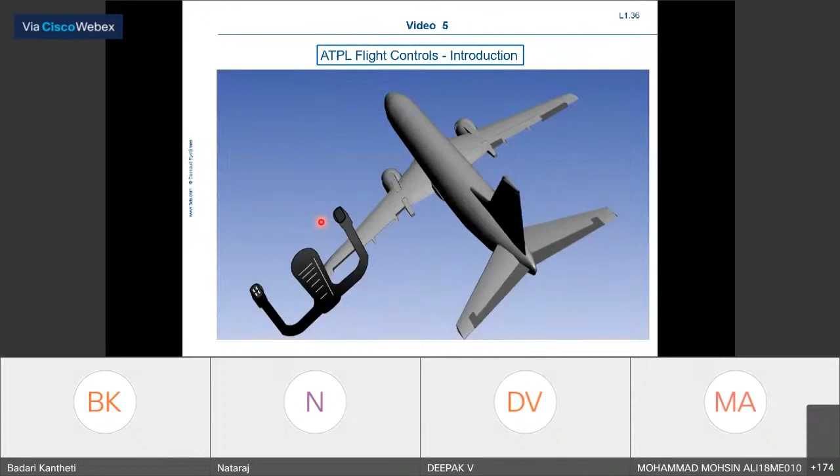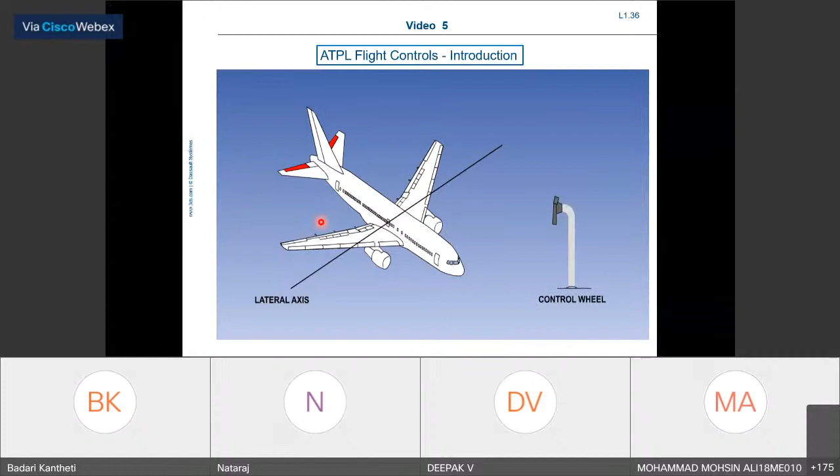The aircraft pitches about its lateral axis. Pitch control is most commonly achieved by the use of elevators. The elevators are controlled by moving the control wheel or control column fore and aft. Pushing the control wheel forward lowers the elevator and the aircraft pitches down. Pulling back on the control wheel raises the elevator and the aircraft pitches up.

Aircraft yaws about its normal axis. Controlling yaw is normally achieved by the use of a rudder. The rudder is controlled by the rudder pedals.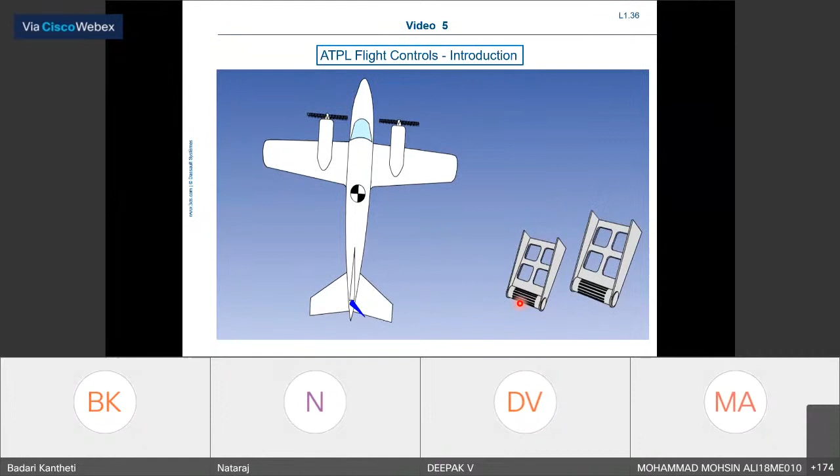Pushing the left pedal forward causes the rudder to move to the left, and the aircraft nose to yaw left. Pushing the right pedal forward causes the rudder to move to the right, and the aircraft nose to yaw right. The ailerons, elevators, and rudder are known as the primary flight controls.

Okay, so now we'll move on to the next topic, that is on the materials. So an important thing as a designer, we always look for lightweight materials which will give you higher strength, stiffness and durability. All these factors are very important. A similar thing is also

true with aerospace materials. And also we have to constantly look at the cost parameters, from material purchase to actual final fabrication and then assembly. And at the same time, we also talk about stability and reliability during the usage of the entire vehicle throughout the life cycle. Okay. So apart from that, another important thing we have to see is durability.

So durability is nothing but how long my components or my material can work. Okay, so this has to go through without any replacement. This is what we expect, but that may not be true all the time. So these durability elements are in the form of fatigue. That means a lot of vibratory loads are going to come. Aerodynamic variations are going to come.

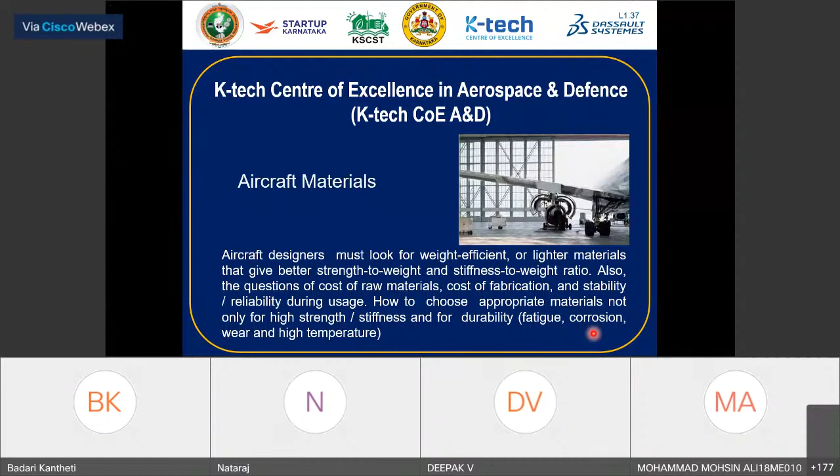So of late, over the last 50 years, there's been huge development in composite materials and manufacturing procedures, the machining procedures, understanding their behavior, how they fail, and how they are going to behave in usage. And a similar thing is true with plastics or polymers. And in some cases where we want high temperature barriers, ceramics are also generally used.

So in all this selection, apart from strength and stiffness, as I said, the cost is also a very important thing. Other important things are durability, fatigue, corrosion, toughness, wear and creep. These are some of the points we have to keep in mind.

So if you try to see the major materials being used over a period of time in the materials area, you can see here aluminum over a period of time, as composites evolved and their development took place in every aspect of composite usage, around 2010.

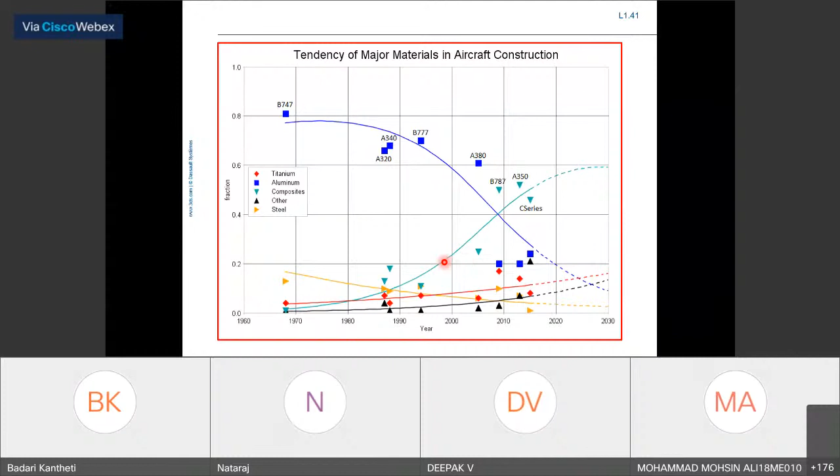Other materials we have are titanium, then steels and other materials, a small percentage here and there based on the aircraft. They will keep changing, but otherwise their usage is more or less maintained. The use of composites, which are lightweight, helps reduce emissions at the same time, so the overall system is becoming very efficient.

Whatever is on the outside surface we can always see, clean and protect. But the interior surfaces are covered with a big plastic cover, and the metallic surfaces are not visible, so we may not be able to make 100% sure they are not corroding. Those are the ones causing problems. As we discussed, wear is very important, and high temperature influence, particularly creep in turbine or engine components, is very important.

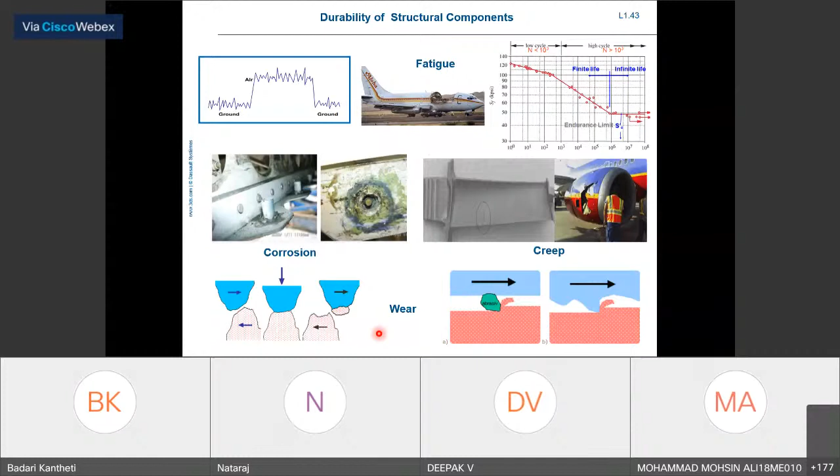At the same time, you also have to worry about wear and tear between components under relative motion. These are the important things one needs to understand while considering the material for a particular application in the aircraft industry. Not necessarily aircraft, it is the same everywhere, but these things are very important.

This clipping will take about 4 to 5 minutes, a little longer. He will explain every material, from metallic to plastic to composites, where exactly they are used and what damages occur, concentrating particularly on corrosion and its influence on reducing component life: corrosion, stress corrosion and different types of corrosion.

In this lesson, we will begin by looking at the materials from which aircraft structures are made, and the effects of corrosion on these materials. We will also examine the effects of a hard landing on the aircraft structure, and look at failure statistics and their effect on flight safety. We will finish by looking at the maintenance methods employed to keep aircraft in a safe and airworthy condition.

Modern aircraft are constructed mainly of aluminium and its alloys, with smaller amounts of steel and titanium for the major structural components. Composite materials are used extensively for more lightly loaded structures. Each material is chosen for its particular properties with regard to heat strength, wear resistance, strength to weight ratio, fire resistance, and so on.

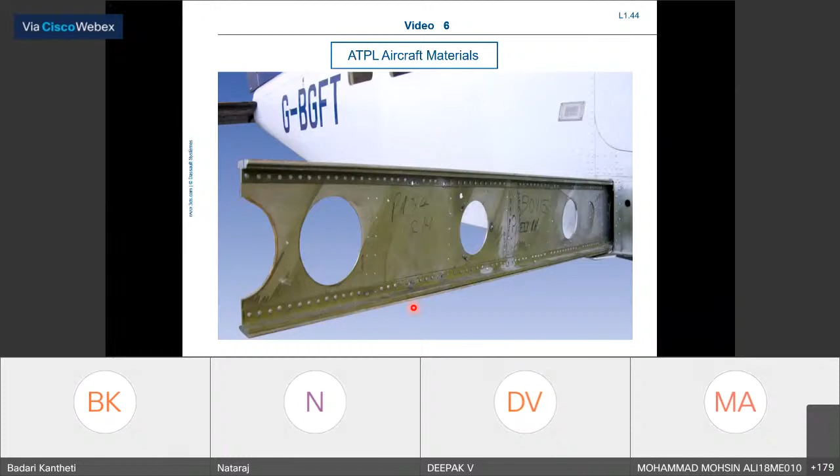Aluminium alloys are the most widely used metals for structural use, due to them having a good strength-to-weight ratio. Duralumin is an aluminium and copper-based alloy, which has poor corrosion resistance, except when clad with pure aluminium. It has good thermal and electrical conductivity, and good fatigue resistance, but it is difficult to weld. Aluminium-clad duralumin is the most popular material in use for airliner skin.

Steel and its alloys are relatively heavy, but can be made very strong. They are used only where strength is vital and weight can be ignored, for instance, undercarriage units. Titanium is much lighter than steel, but it is just as strong and can be used where fire protection is required, for instance in engine firewalls. Titanium has good strength, and it retains this strength and its corrosion resistance up to temperatures of 400 degrees Celsius. It is, however, expensive to produce.

The SR-71 Blackbird was the first aircraft to make extensive use of titanium within its structure, paving the way for its use in modern fighter and commercial aircraft. The Boeing 777 uses some 58 tons of titanium in its construction.

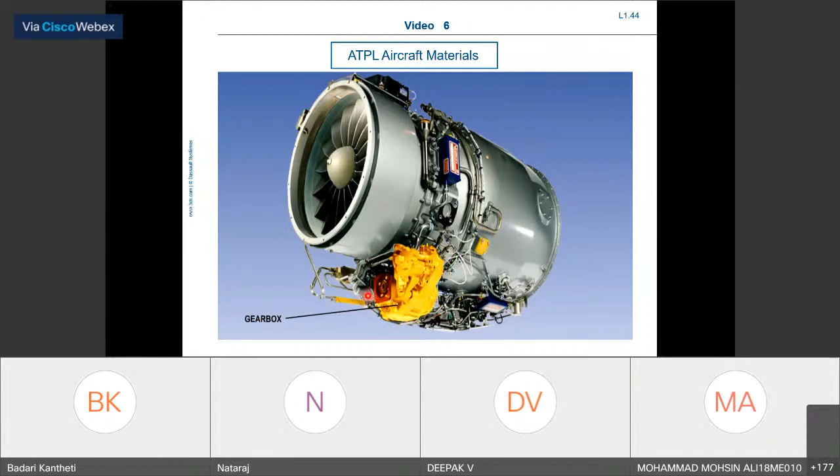Composite materials are becoming more and more used in aircraft construction. They are made up from layers of fiber, carbon, glass, Kevlar, molded into the required shape with a hot plastic resin, which is normally epoxy. Carbon fiber reinforced plastic is used where structural strength is required. It can be produced with the same strength as an aluminium alloy, but with a weight saving of about 20%.

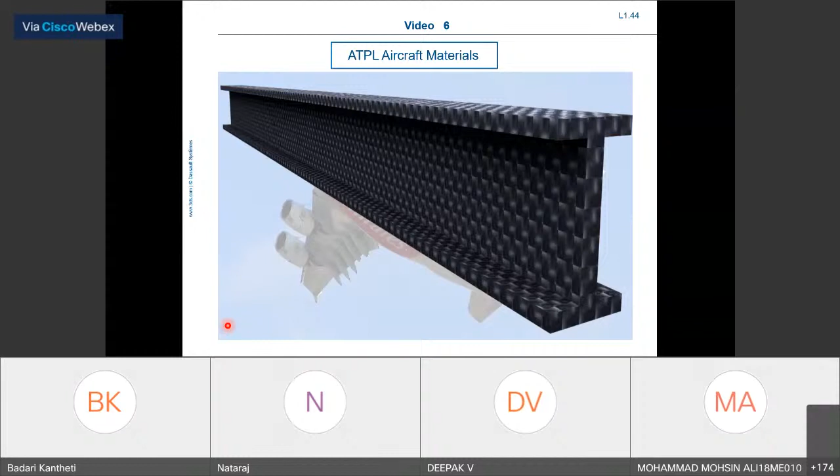Glass fiber reinforced plastic does not have the same structural strength, but is often used for fairings and non-load-bearing panels because of its light weight. Kevlar has very low electrical conductivity and high fire resistance. Aircraft cabin doors, overhead bins, and bulkheads may be built with honeycomb cores made up of Kevlar.

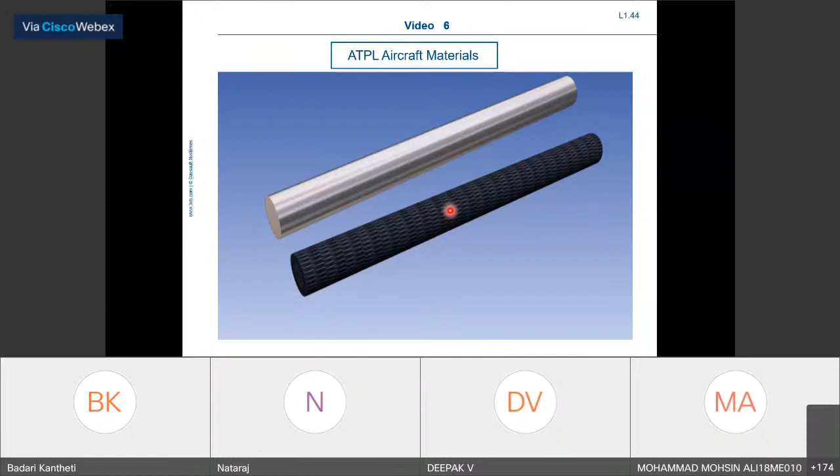Composite materials have good resistance to corrosion and can be easily formed into complex shapes, but their fatigue behavior is different to that of conventional metal alloys. Metal structures suffering fatigue retain their design strength up to a critical point, after which failure occurs very rapidly, whereas composites lose their properties gradually.

Interest in composites for structural use is due to their high specific strength and specific stiffness, allied with their ability to retain these properties at high temperatures. The Airbus A380 uses a significant amount of composite material in its construction. The tailplane, for instance, is almost entirely constructed from carbon fiber reinforced plastic.

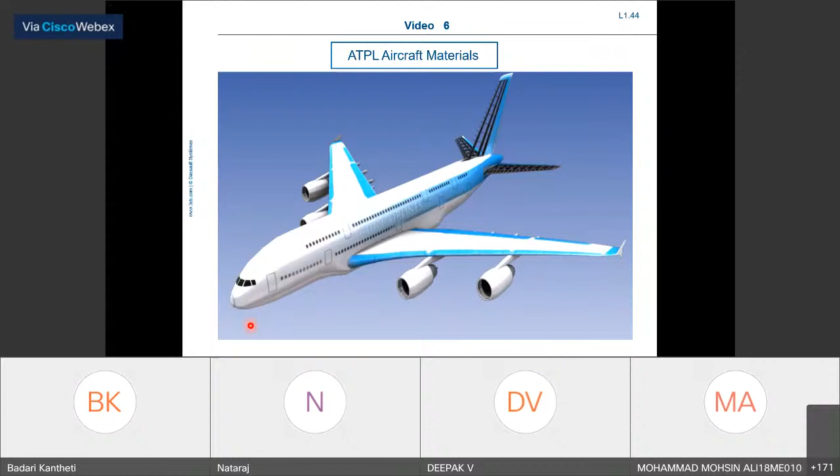Corrosion is the slow destruction of metal by electrochemical reaction. It is one of the most persistent defects found in aircraft. Rectification of advanced corrosion has been known to take thousands of man-hours. In fact, more than 10% of engineering downtime is spent in dealing with corrosion problems. It is therefore essential that it is recognized at the earliest possible stage, and that effective preventative measures are taken.

When a metal is exposed to the air, oxygen in the air reacts with the bare metal to form an oxide film, which adheres to the metal surface. This oxide film forms a barrier between the air and the metal surface, which can protect the underlying metal from further attack. A good example of this is the Statue of Liberty. It is clad in copper, and developed a green copper oxide coating, which protects the metal from the elements.

With the exception of oxidation, all other corrosion takes place when the metal is in contact with water, either as liquid or as water vapor in the atmosphere. Corrosion is mainly electrochemical in character and occurs in conditions that permit the formation of minute electrical cells in or on the intact metal in the presence of an electrolyte.

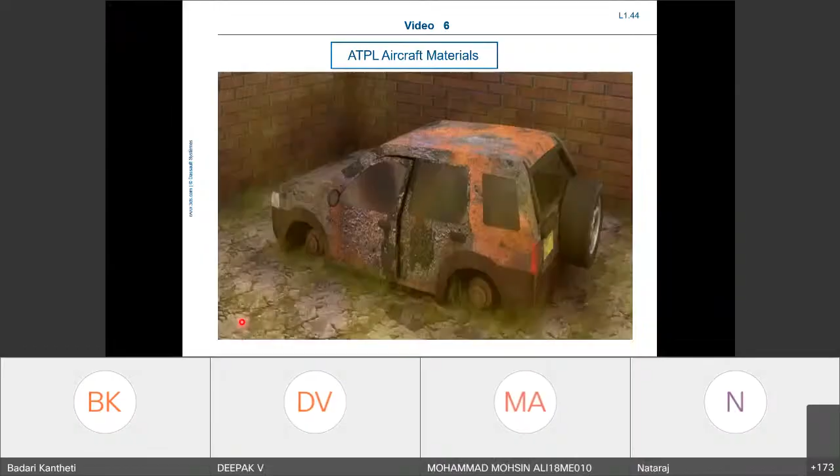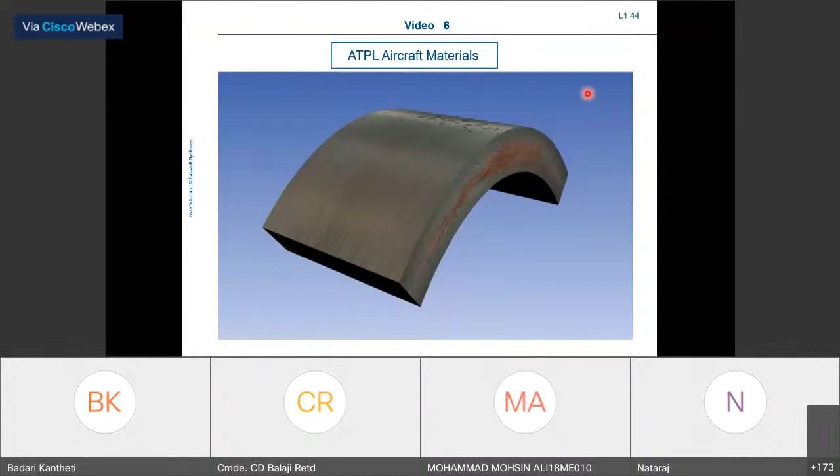So, yeah, so he will continue.